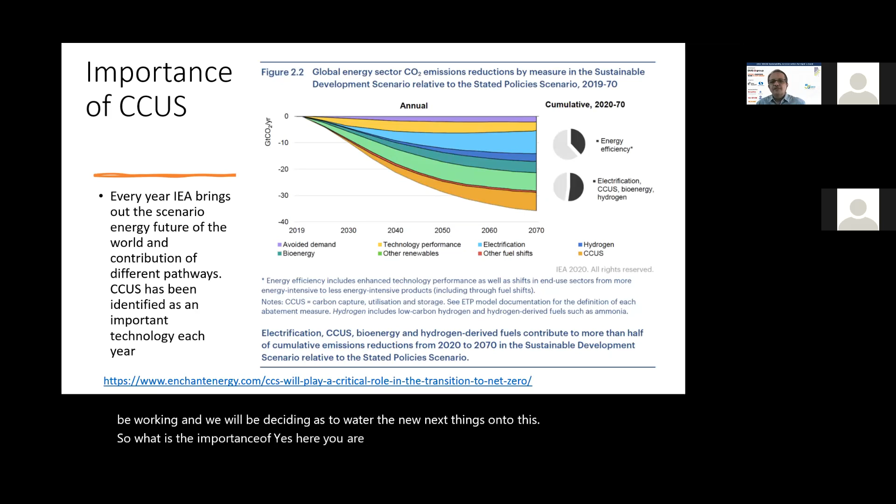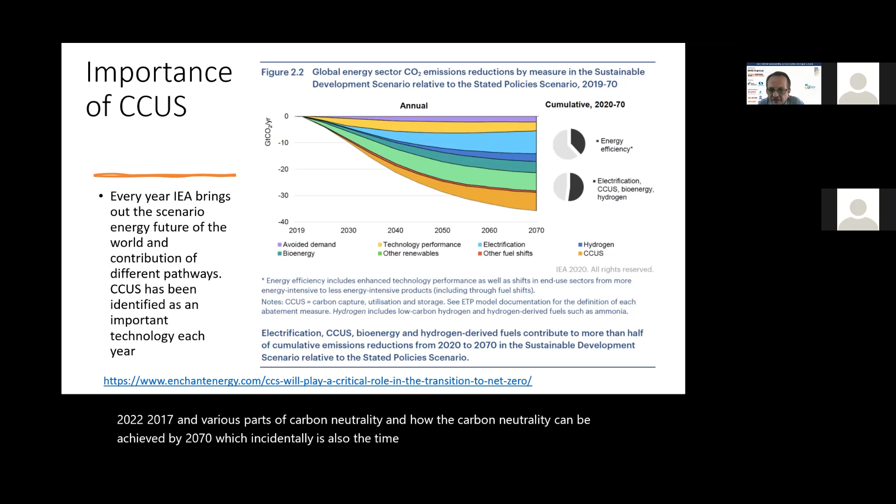What is CCUS? So basically, it's carbon dioxide, CO2 capture, CO2 utilization, and CO2 storage. These are the fundamental elements within which we will be working, and we will be deciding what the next things are onto this. Okay, so what is the importance of CCS? Here you are able to see the projections of IEA between 2020 to 2070 and various parts of carbon neutrality, and how carbon neutrality can be achieved by 2070, which incidentally is also the time by which India itself has committed to be carbon neutral.

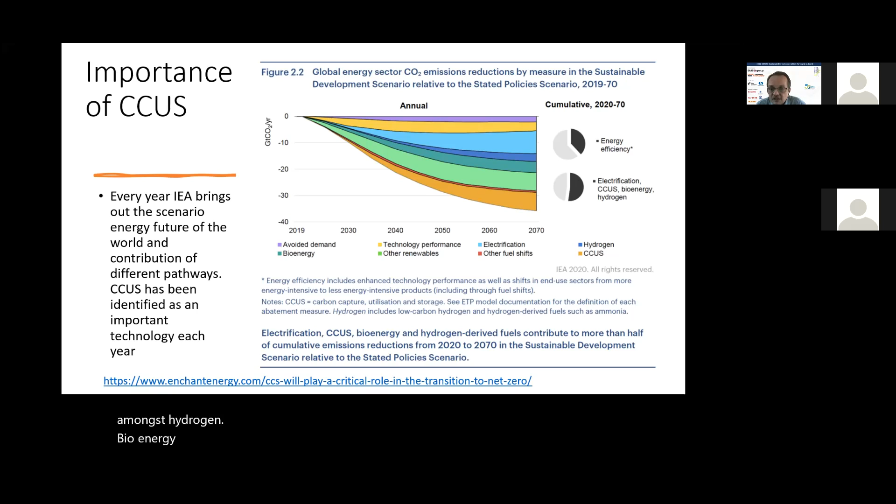So in this IEA scenario, as you see, initially CCS is practically zero, and it tends to increase slowly. And over time, it has a sizable share, one of the largest decarbonization tools available amongst hydrogen, bioenergy, renewables, technology performance, and fuel shift. All these things put together, one of the largest cumulative shares is coming to CCUS. Energy efficiency, of course, plays a vital role, and electrification. But even in electrification, there is a role for CCUS to play. There is a role for renewables to play. So that is the overall way you see it and why you are looking at CCUS as a technology.

Now, coming to the next, what are the effects of CCUS? And probably this is something which will be linking to the finance aspects of CCUS, as to why you need a specific kind of finance for CCUS. What is seen is that almost 90% of CO2 emission is captured when CCUS, carbon capture, utilization and storage, is used. Present day technologies are already at a state of the art where 90% of CO2 emission can be captured through commercially available CO2 capture technologies.

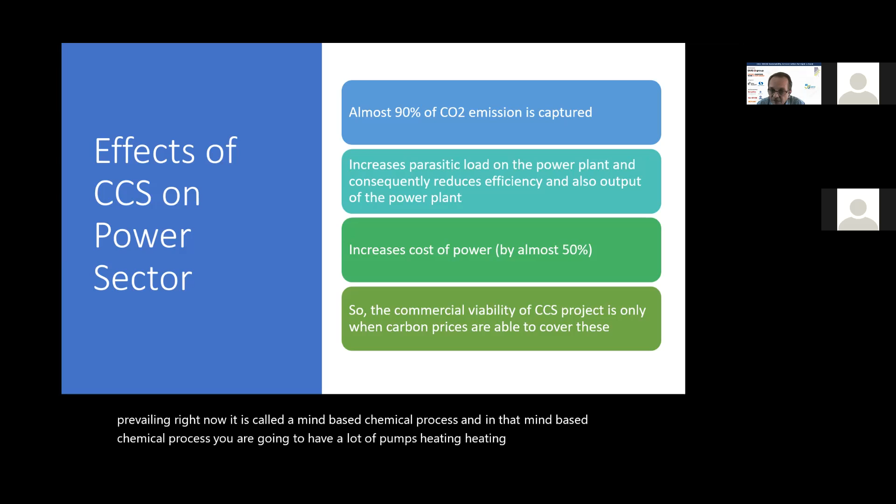But it increases the parasitic load, because it's a chemical process which is prevailing right now. It is called the amine-based chemical process. And in that amine-based chemical process, you are going to have a lot of pumps, and heating will be involved. Then there will also be other systems involved which will be consuming electricity. So that increases the parasitic load on the system, just like a power plant system has its own cooling towers, its own pumps, boiler feed pumps, etc. Similar to that parasitic load, additional loads of pumps and cooling, etc., will be added when current amine-based systems are involved.

So, in those things, what you can try to do is the calculation. The other day we were talking to Indonesia as to when they are planning to do CCS-based power plants. We were trying to understand what it is implying on the cost and how they are going to meet it. When we talked to them, the reply came that when they apply CCS, the cost of power is going to increase by almost 50%.

Now that is a very, very substantial amount of energy consumption and parasitic load that you are going to have on the project. And that is why the finance part, or how to manage the cost of CCS, becomes a very important thing. That is one of the fundamental reasons why, instead of storage, people will be more inclined to go for utilization, because CO2 utilization has its own value. It has an additional income stream and probably it will cover part of this system.

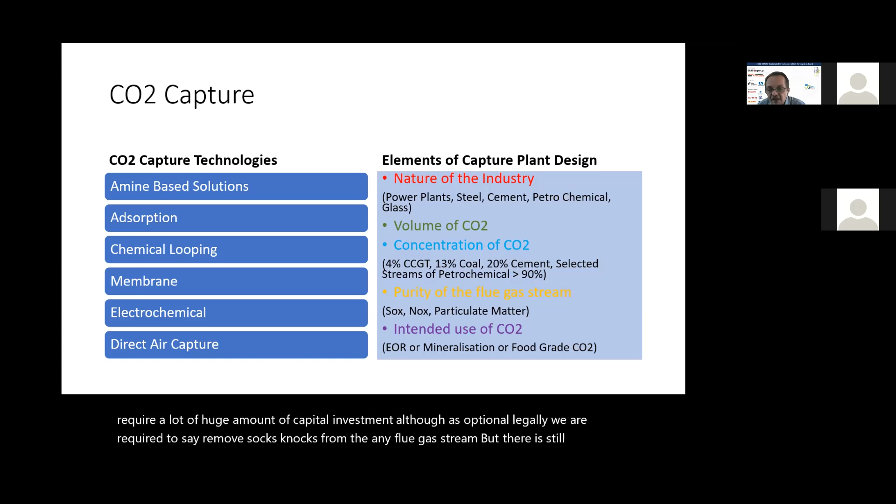Although legally most of us are now required to remove SOx and NOx from any flue gas stream, that is still not a prevailing practice in countries like India, Indonesia, and even to some extent Australia. So although this is an added advantage, it is going to put an additional strain when you are going to design a plant as such.

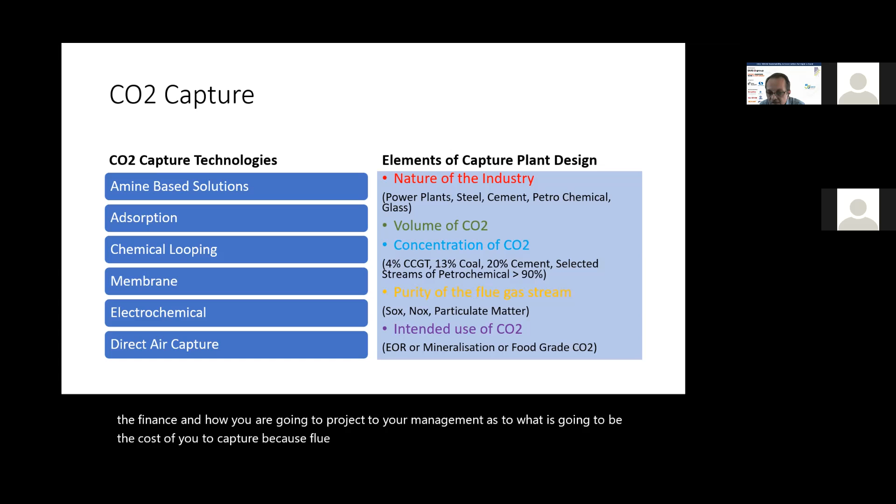So one has to be very careful while deciding what the finance is and how you are going to project to your management what the cost of CO2 capture is going to be. Because flue gas cleaning, say SOx and NOx cleaning, is going to form a very substantial part of your CO2 capture system. So that should be allocated towards air purification and not be put on the GHG side. This is one of the ways of designing your finances and allocating your financing system.

The other thing is the intended use of CO2, and based on that the purification of your CO2 system will be decided. CO2 can be used as food grade CO2, or for enhanced oil recovery. In all these places the purification requirement of CO2 is going to be different, and your capital expenditure and operating expenditure will be different accordingly.

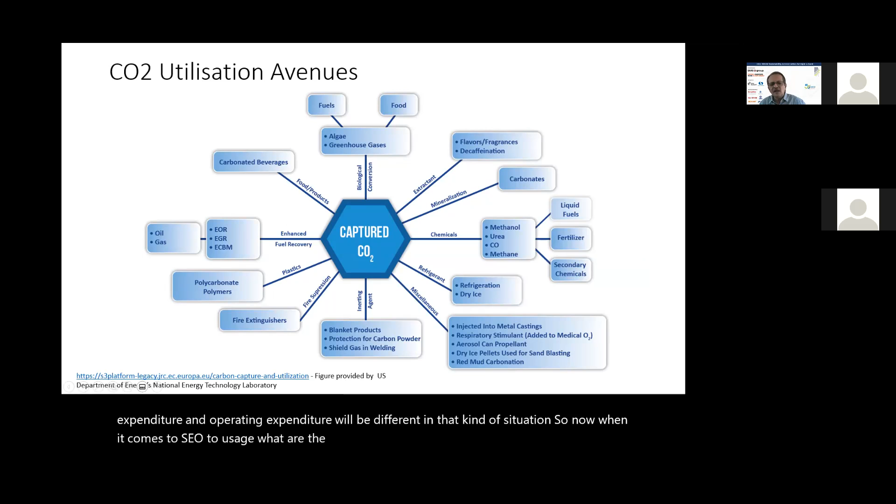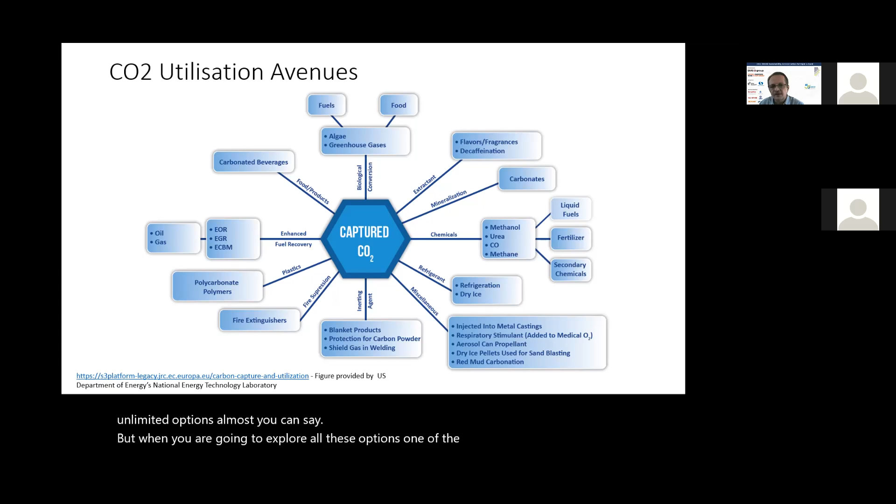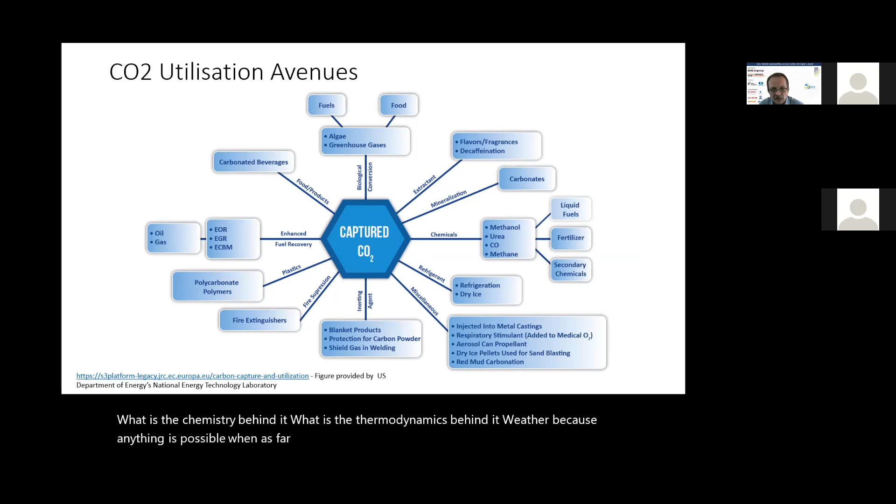So now when it comes to CO2 usage, what are the options you have? There are almost unlimited options, you can say. But when you explore all these options, one of the fundamental things to look at is: what is the chemistry behind it? What is the thermodynamics behind it? Being a mechanical engineer, I have a very simple notion of how CCS or CO2 utilization can be done.

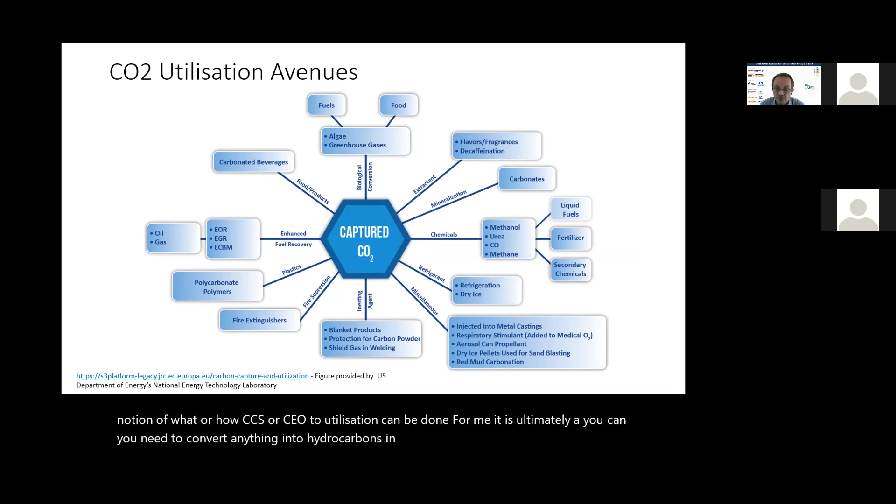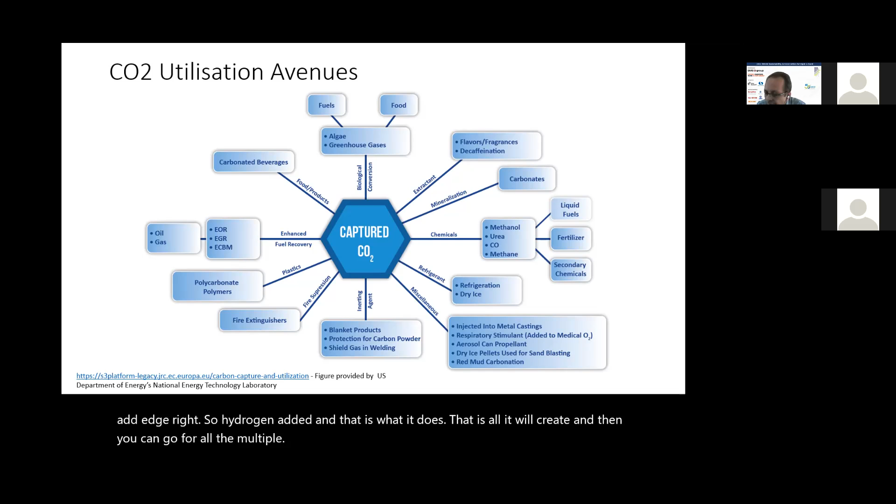For me, ultimately you need to convert anything into hydrocarbons, say plastic or fuel or something. In the case of hydrocarbons, you have C, H and O. So it is only H that is missing, and all you need to do is add H, right? Hydrogen is added, and that is what it creates, and then you can go for multiple permutations and combinations of various chemicals.

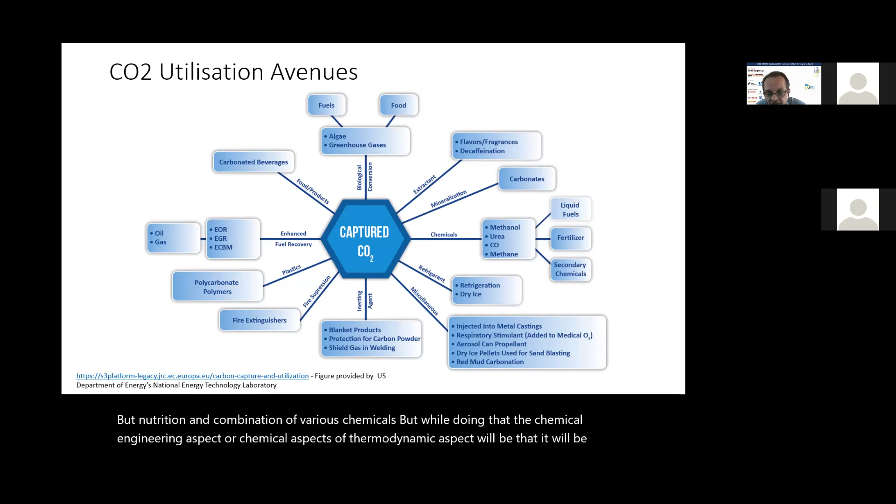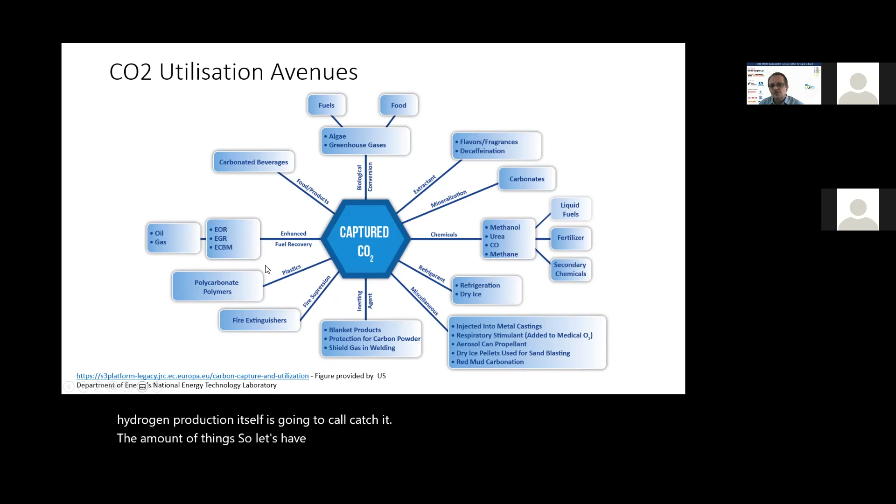But while doing that, the chemical or thermodynamic aspect is that it will require that much additional energy. Each time you add hydrogen to that CO2 structure, the hydrogen production itself is going to affect the amount. So let's have a brief overview of the different things you can do. This is a very well-known figure, but let's go through it.

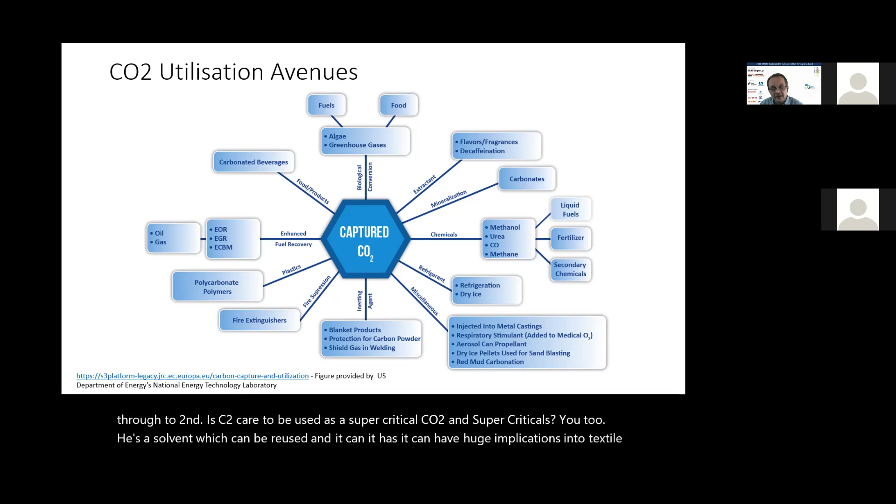There are some direct uses of CO2. One is fire extinguishing, where all you need is CO2 and you can spread it. Second is supercritical CO2, which is a solvent that can be reused, and it can have huge implications in the textile industry. It will practically eliminate your water. But that is not a very big CO2 usage; in terms of consuming CO2, very little can be done. But it's a very interesting thing.

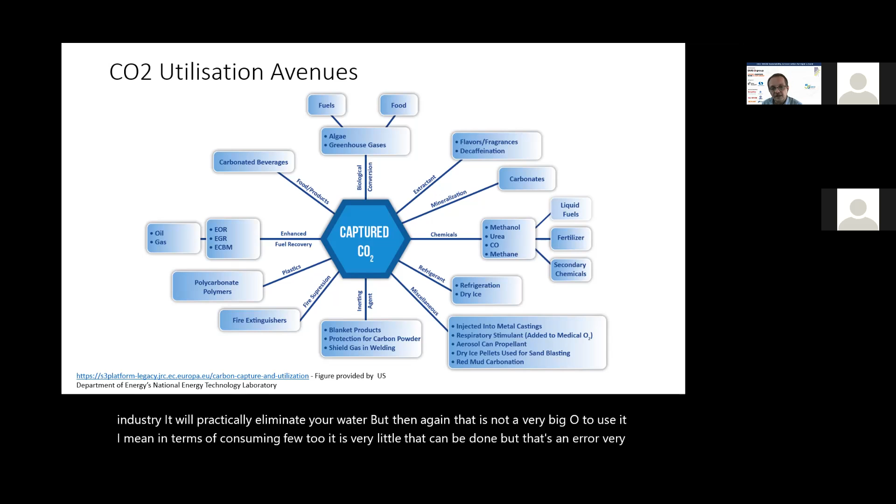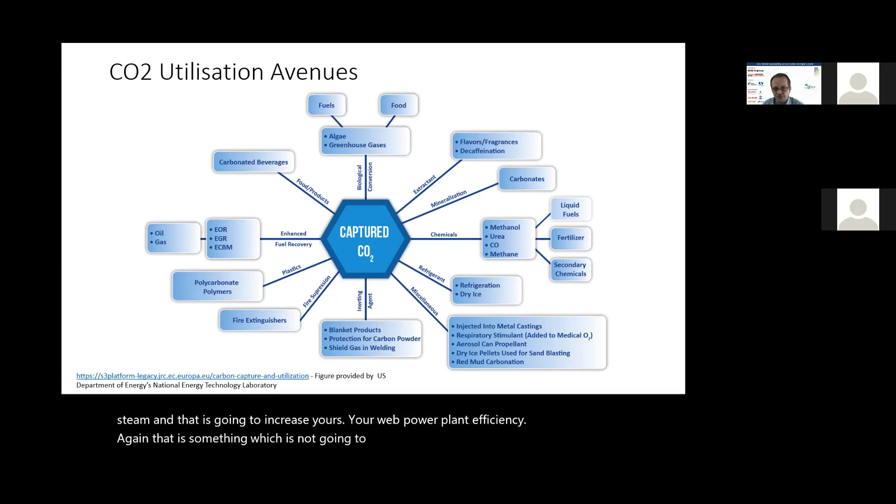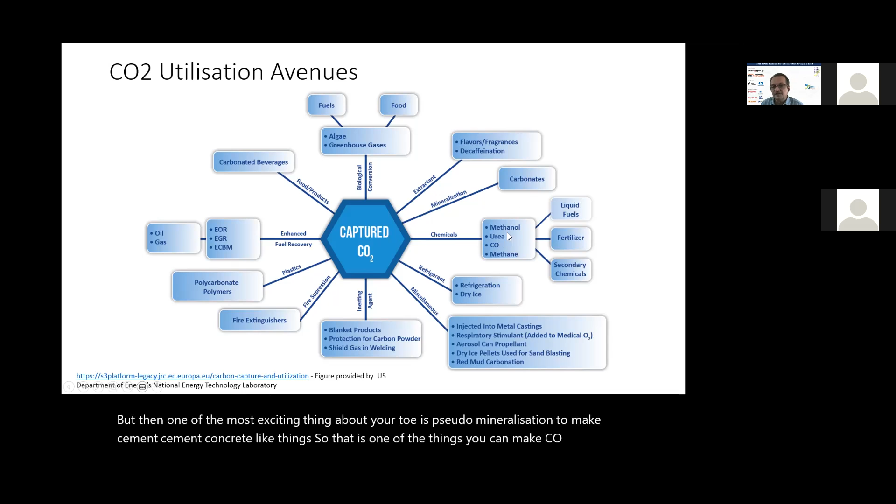Supercritical CO2 can also be used in power plants instead of steam, which will increase your power plant efficiency. Again, that is not going to take a big chunk of the CO2 emitted. But one of the most exciting things is CO2 mineralization to make cement and concrete-like things. You can convert CO2 to chemicals such as methanol, urea, carbon monoxide, methane, ultimately liquid fuel, fertilizer, or secondary chemicals. We will see a case study a little later which will give you some understanding.

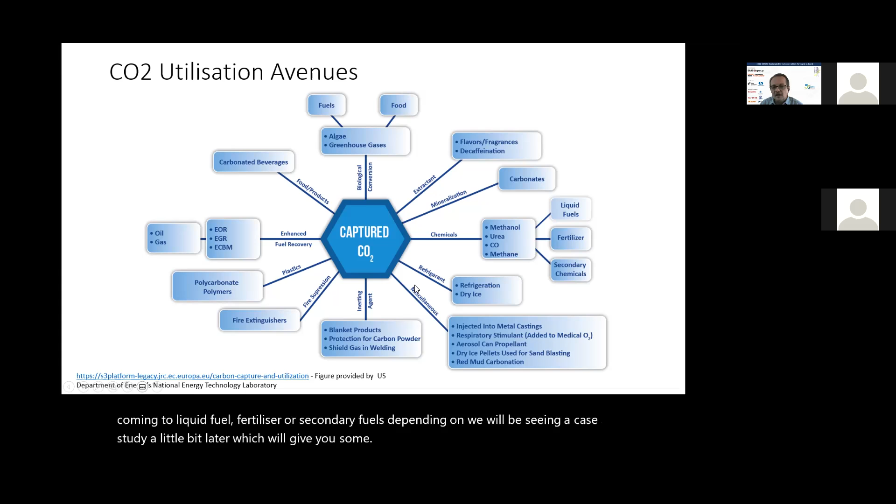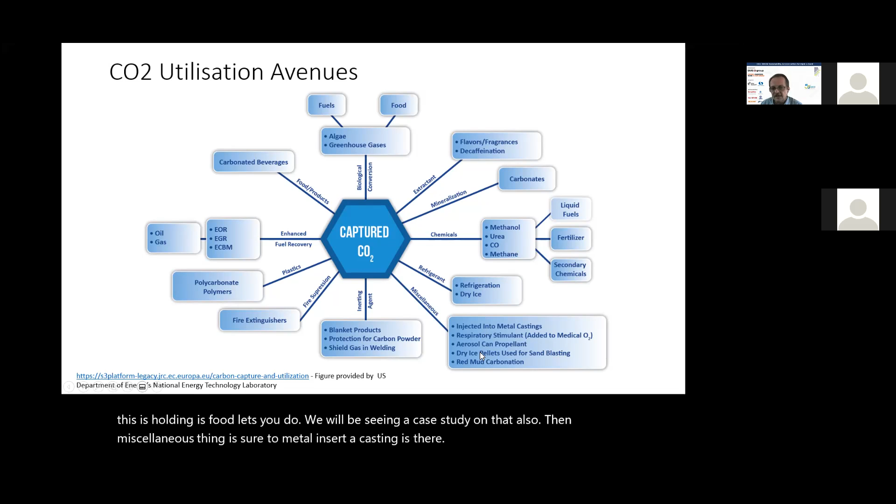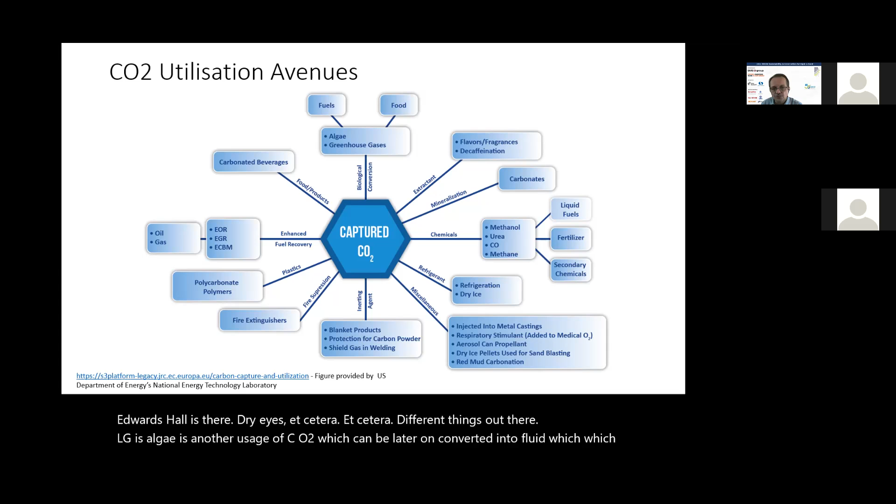Refrigerant is another usage, where dry ice can be made. This whole thing is food grade CO2, and we will see a case study on that also. Then miscellaneous uses include CO2 in metal casting, aerosols, dry ice, etc. Algae is another usage of CO2, which can later be converted into a fluid that acts as petroleum itself, and then you can go on to make different chemicals out of that.

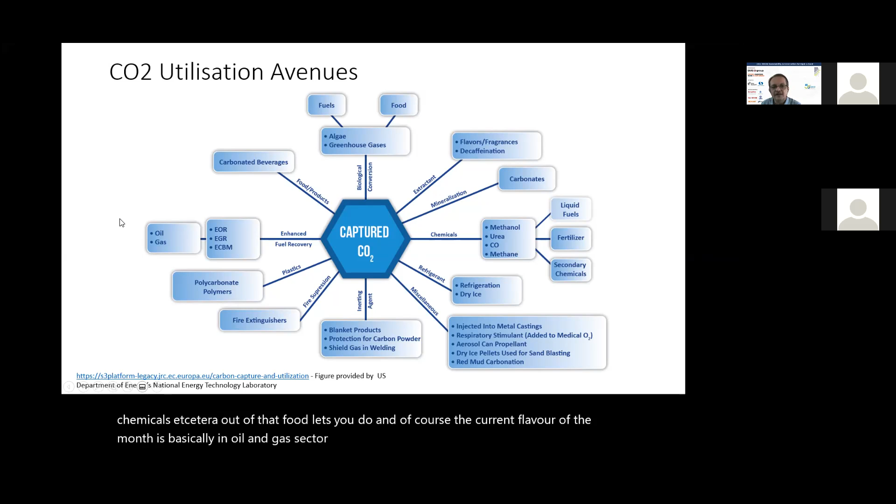Food grade CO2, and of course the current flavor of the month is in the oil and gas sector: enhanced oil recovery, enhanced gas recovery, enhanced coal bed methane recovery. That is one of the most important things. It can take up a huge amount of CO2 and it can work for you.

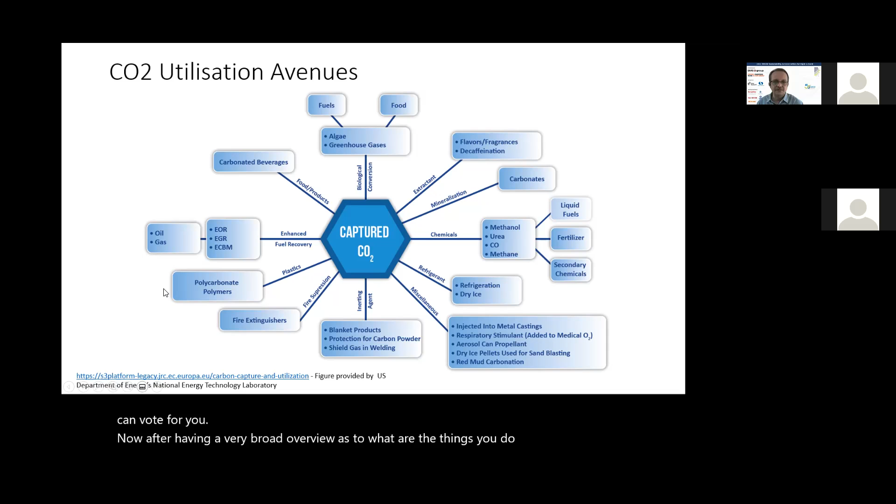Now, after having a very broad overview as to what are the CO2 utilization avenues, let's go to the next step on to the utilization thing. So, estimation of CO2 storage. This is one of the very, very important aspects of CO2 storage, because you need to know geology, and there are different avenues for you to save CO2.

It can be in saline aquifers, oil reservoirs, gas reservoirs, coal bed methane, geothermal reservoirs, etc. It can be done. But saline aquifer is one of the most important forms of CO2 storage. Its contribution to the overall CO2 storage scenario is more than 90-95%, depending upon different places.

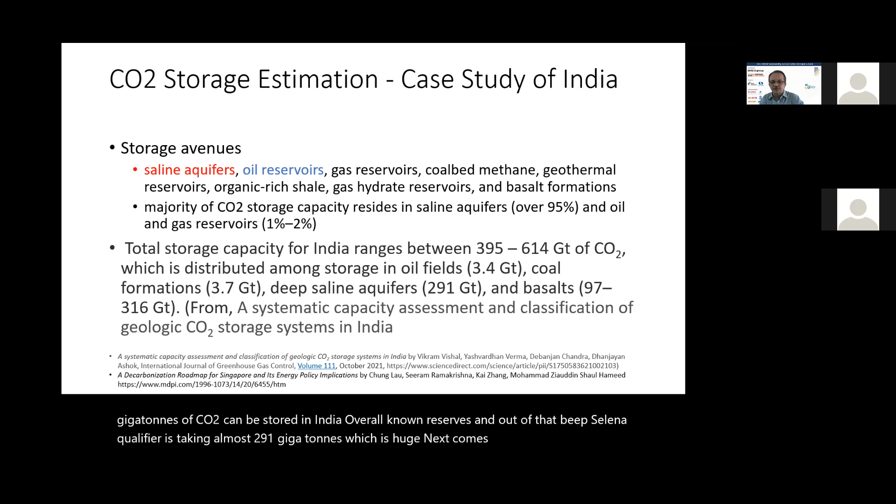Let's go a little bit further to see what is the potential of CO2 storage, say in India, as estimated according to a very latest report that has come recently. About 400 to 600 gigatons of CO2 can be stored in India overall, the known reserve. And out of that, deep saline aquifer is taking almost 291 gigatons, which is huge. Next comes basalt, and thereafter a few other things are there. So let's try to understand this.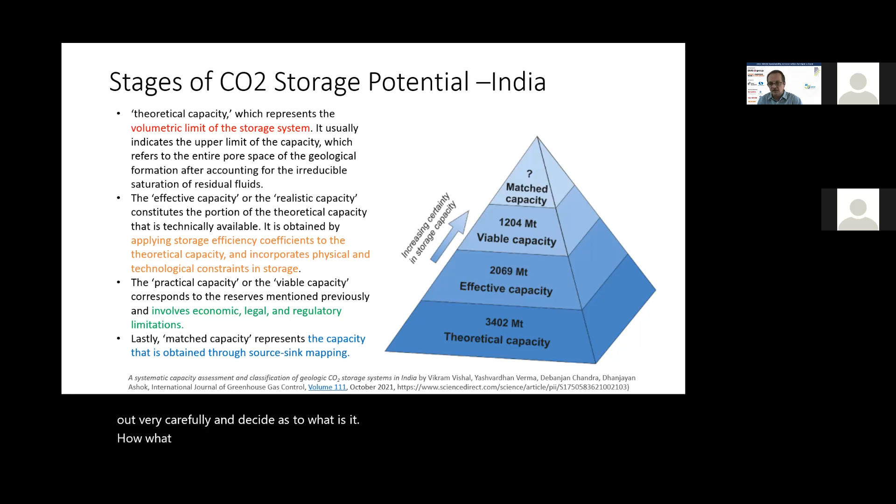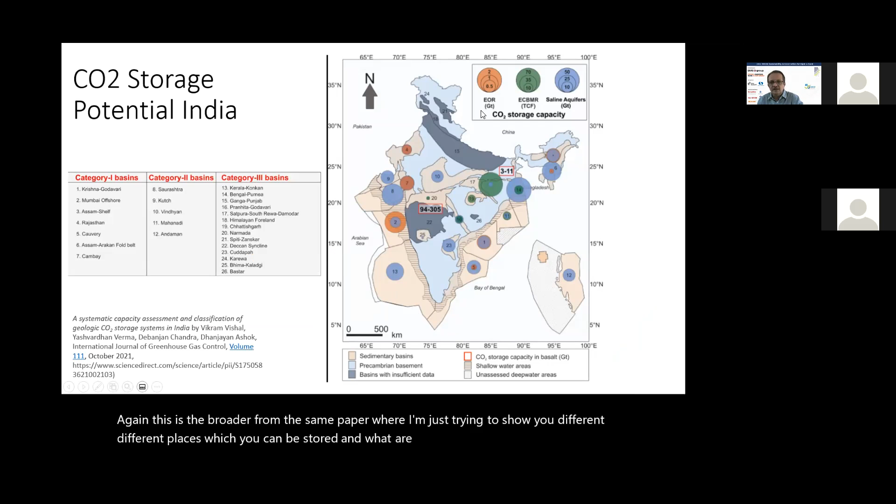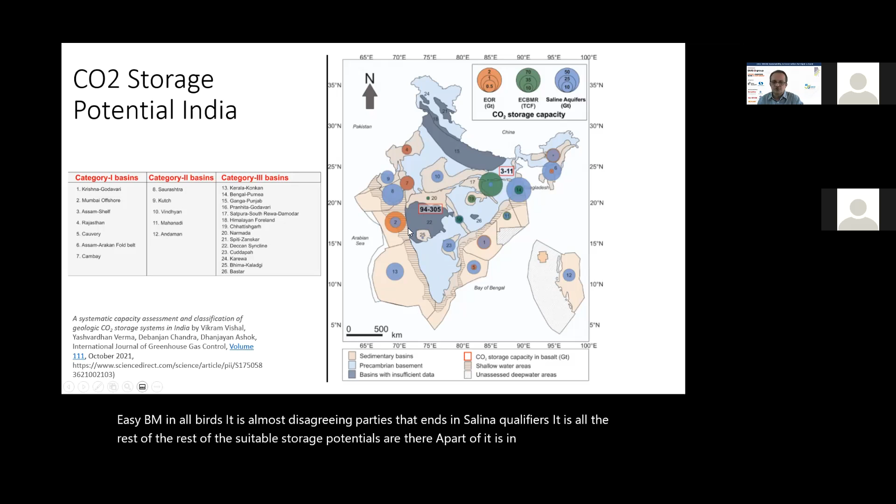Again, this is the broader picture from the same paper. I'm just trying to show you different places where CO2 can be stored and what the aspects are. This orange part is enhanced oil recovery. ECBM in coal beds is this green part, and in saline aquifers are all the rest of the CO2 storage potentials. Part of it is offshore, part of it is onshore, and a lot of storage potential is yet to be assessed and understood, as can be seen from this.

Now, one of the important things when we are considering financing of CCS is that so far most of the projects have been taken up as individual projects. There is a standalone project done, say, in Canada. Another standalone small project is done, say, in Australia, which is at a stage of proof of concept, wherein once it is established at laboratory scale, whether the project can be done at a commercial level, that testing is still being done. But going forward, there will likely be a number of such projects.

So all these projects will have their own CO2 capture system, which is going to be independent and standalone. That element is there. But there is a potential when there is a cluster of industries around some place. That is when you can try to integrate all the CO2 carrying pipelines and CO2 injection infrastructure as a common thing.

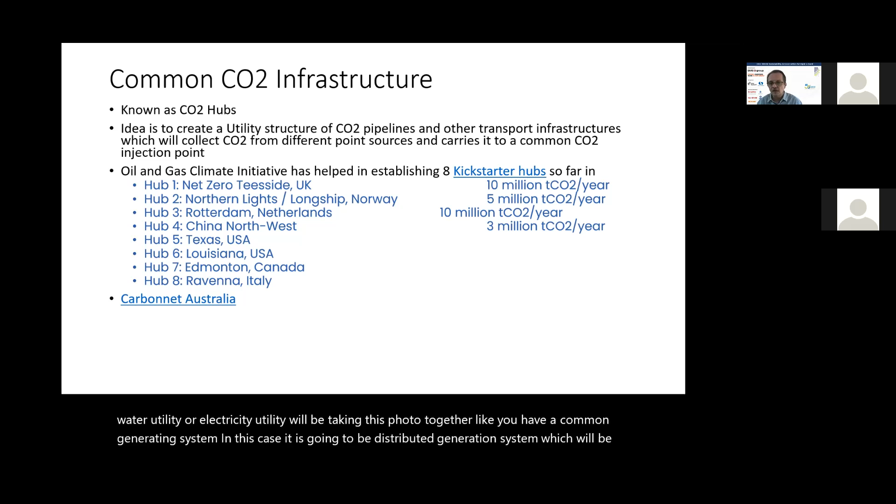Instead of putting all individual pipelines, you can have a common CO2 carrying pipeline and injection infrastructure. It will work almost like a utility, like water or electricity utility. You will be taking the CO2 together, like a common generating system. In this case, it is a distributed generation system getting together in a common collection line, which will then go into the main chunk of transmission line.

This is a concept which has been coming up in a big way. The Oil and Gas Climate Initiative has already identified 8 such projects across the world, and the list is given here. They call it Kickstarter hubs, and the link and everything is given here.

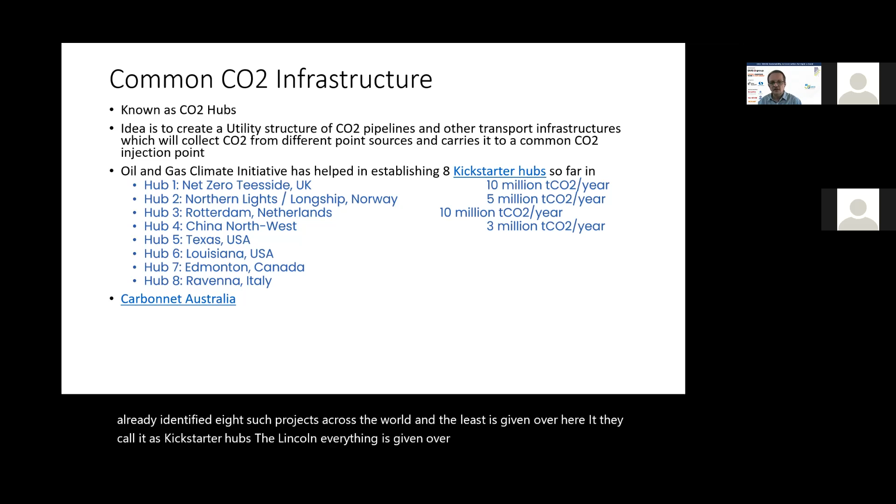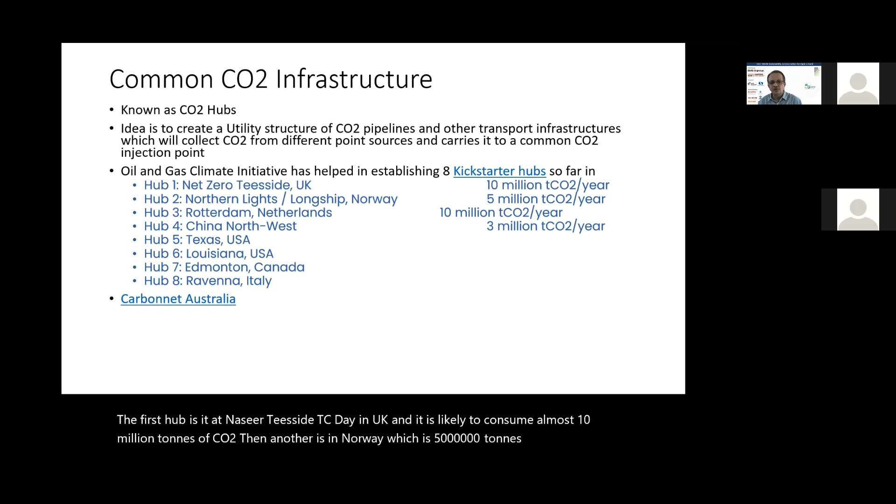The first hub is at Net Zero Teesside in the UK, likely to consume almost 10 million tons of CO2. Then another is in Norway, which is 5 million tons of CO2. Then Rotterdam, 10 million tons of CO2. In China, they have a collective capacity of 3 million tons of CO2, and so on.

Similarly, there is another project coming up in Australia. Indonesia is also working very closely on developing this kind of hub and spoke structure.

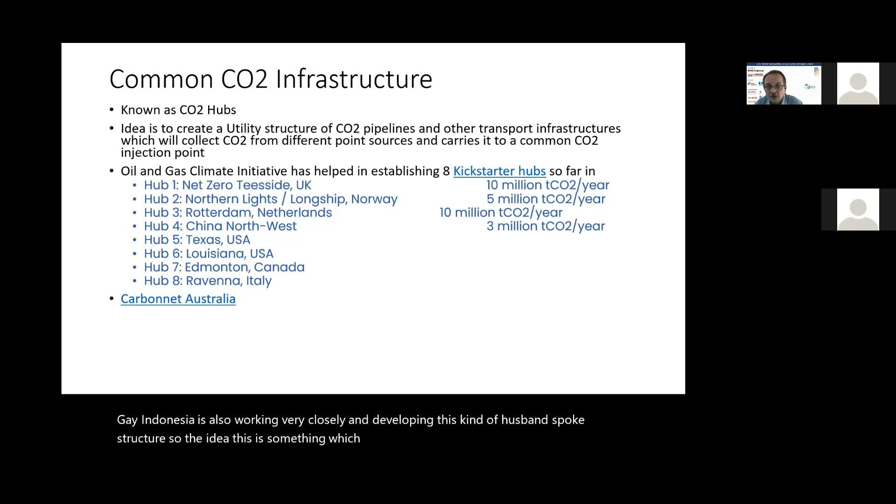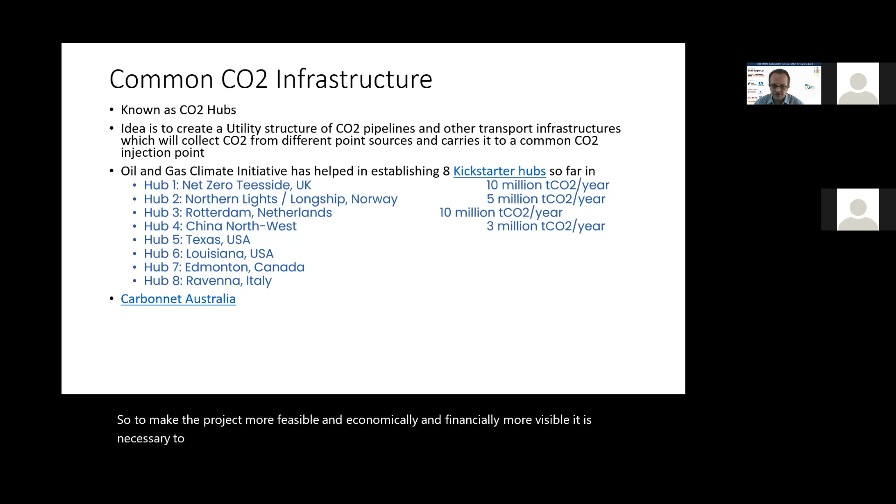The idea is that CO2 capture is no longer a question of technical viability alone. Technical viability might not be an issue, but feasibility is. So to make the projects more feasible economically and financially, it is necessary to give them enabling infrastructure. Let's try to see what are the considerations when common CO2 infrastructure projects are being developed.

One consideration is the site, which should be near the point of injection and the point of collection, the point source of CO2 emission.

Longer term planning is needed, considering what new projects will come up and what future expansion issues there will be. Then the next issue is the business model, whether it is going to be a public utility like electricity, a private plant, or a PPP, public private partnership. All those things one may have to consider.

From a business perspective, what should be the capital structure or how the new generation will be financed? What is the cost which will be acceptable to the industry which is going to inject and operate it?

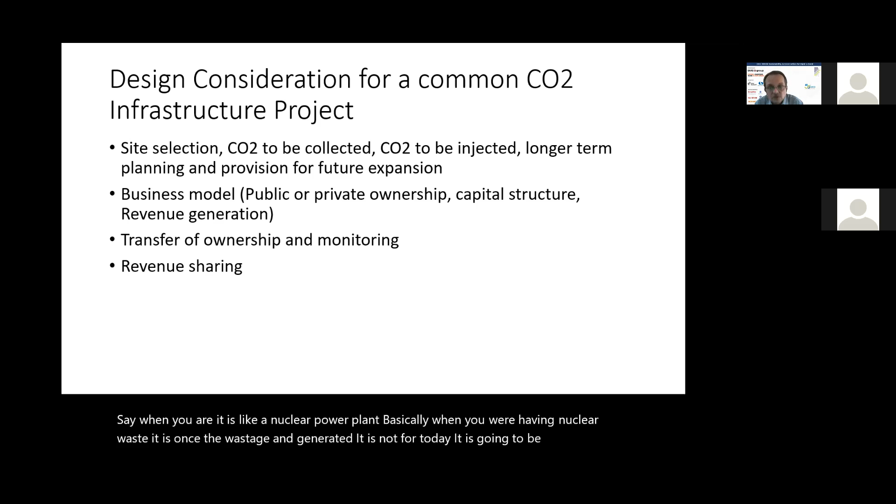This CCS is actually a lot like a nuclear power plant. When you have nuclear waste, once it is generated, it is not just for today, it is going to be there for hundreds and thousands of years to come. The same is the case with CCS. Once it is stored, the CO2 captured and stored in a place, just like oil and gas which is not brought out, it is going to be there for hundreds and thousands of years.

Once CO2 is injected, it is ideally going to be absorbed into the seams, and over a longer period of time, it is going to be converted from CO2 to say calcium, etc., and small carbonation will take place.

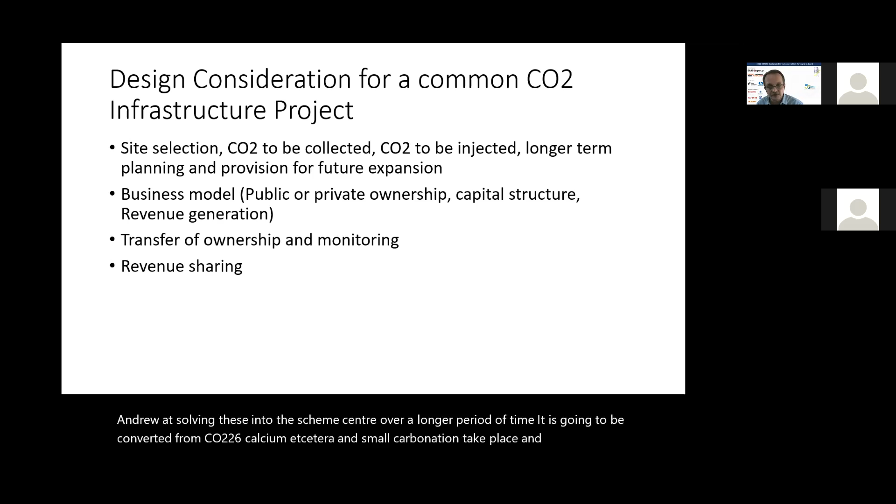But until that point, there is the responsibility of an operator, at least for say 30 to 40 years from the time the CO2 has been injected, to see that the CO2 is stored and monitored. Because there is also the issue of carbon credits, it has to be ensured that CO2 has not leaked back into the environment. These are the additional expenses you will have to consider if you are considering a CO2 storage system.

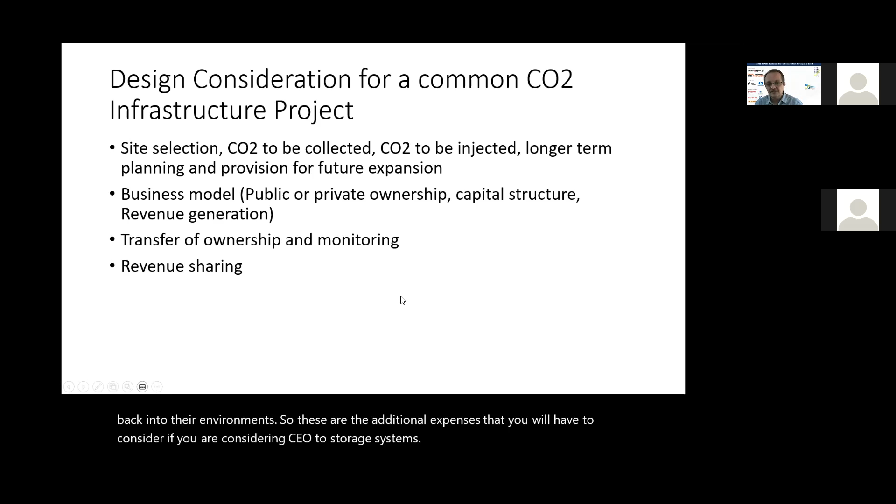So that's the finance aspect of CO2 storage. Now let's try to understand, since the overall course is looking at net zero, in context of net zero, what is going to be the role of CCS. I've taken a case study from a paper which looked at what will be the role of CCS in making Singapore a carbon neutral country, or net zero.

Now this can be different in different countries. Refining, hydrogen production, introduction of EVs, biofuel, etc. are also playing a role, but ultimately the major part is going to come through CCS.

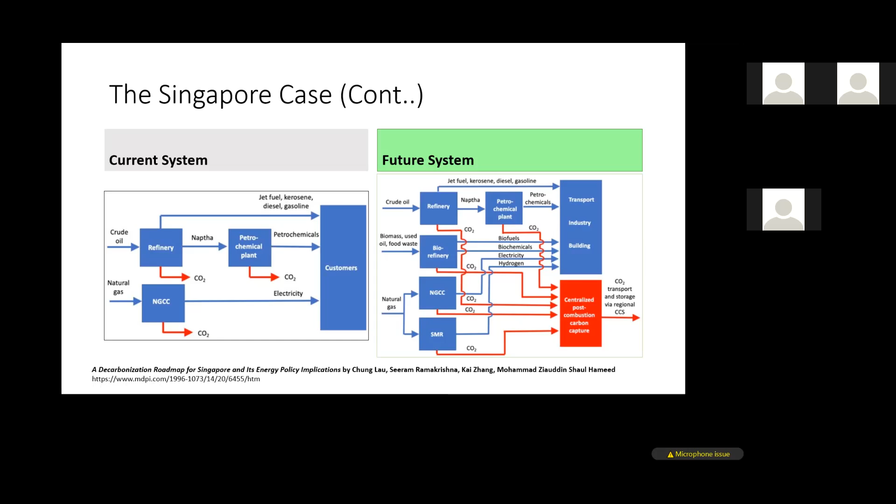Now, I'll take you to some of the case studies that we have done as part of my ADB assignment. This is a project wherein we saw a refinery sector in India. It is actually a petrochemical sector.

So in petrochemicals, we had a case in India wherein there was an MEG plant, from where almost 90% pure CO2 was available and was being emitted. If you go through this link, you will be able to access the summary of the report - not the whole report, because of confidentiality issues we were not able to put up everything that was discussed.

But essentially, the CO2 was more than 90% pure. It had no practical impurity. So all you had to do is capture that CO2 and convert it into food grade CO2. So if you see the economics of it...